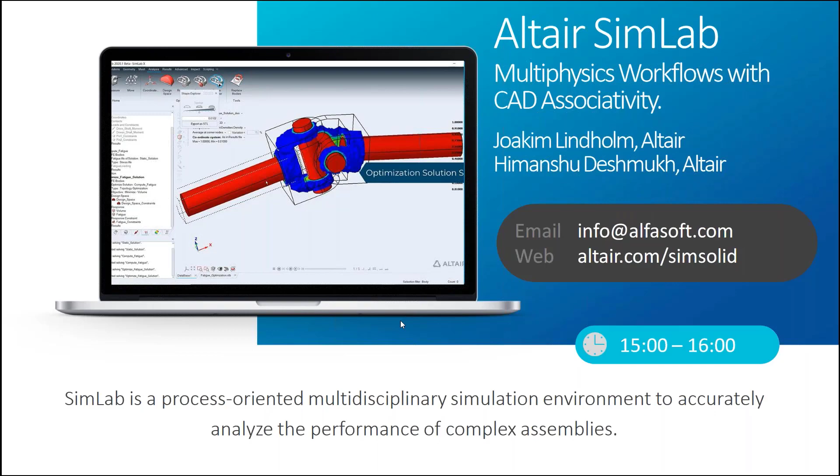Good afternoon, everybody. My name is Joakim Lindholm, I'm the Managing Director for Altair in the Nordics region. Altair is a US-based simulation software company that also does services, artificial intelligence, high-performance computing, and all sorts of things. But today, as all the naming confusion implies, we'll be talking about simulations.

We have quite a few different products and platforms called Sim something. Last time we presented at the Alfasoft demo days, we spoke about the product called SimSolid, which is a solution that allows you to analyze really large assemblies directly on the geometry level, and get results like stress, deflections, deformations, and eigenfrequencies. But today we'll be talking about a solution called Altair SimLab, which my colleague Himanshu will be doing a deeper dive presentation and demo of in a couple of minutes.

But before that, I wanted to give you a very brief insight into who Altair is and where we come from, and why SimLab is something that we hope you will find interesting. So just to give some background to who Altair is, we basically come from a background... let's see if I can change slide here. Seems like it's, there we go.

Altair is a company in the engineering software industry. We started out as a company doing engineering services in the simulation space, doing strength and stress simulation in the automotive industry, but quite early on started to develop our own simulation software to be able to perform those analyses. Currently we still have that as some of the main businesses of us.

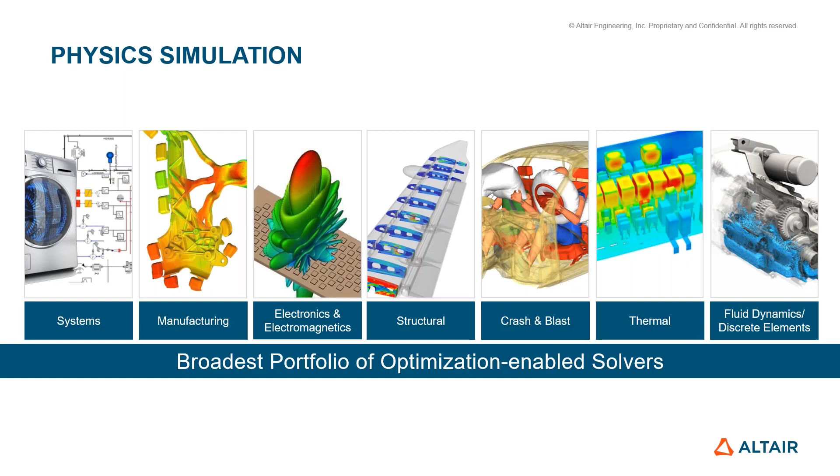As you see, the solution set is really extensive, and to tailor these solutions to different user groups, we package them in a couple of different simulation platforms.

For the large group of designers who benefit from being able to do some basic analysis to support the concept phase and get some insights and understanding that they can use in terms of enhancing the design, we have a simulation suite called Altair Inspire, which is really easy to use, fully geometry based and really intuitive.

On the other extreme, where we have the really skilled and highly competent advanced CAE engineers who do simulation every day, 8 hours a day more or less, typically you find those people in automotive and aerospace companies where they have large groups doing this every minute of the day. There's this platform called HyperWorks, which allows you to do very complex and advanced modeling.

And then in the middle here is what we will be talking about today, which Himanshu will be starting to showcase shortly, a platform called Altair SimLab, which allows you to model and simulate problems from a lot of different physics, both as single physics. So you can do a structural simulation on itself, or a CFD simulation on itself, but you can also start to couple the effects of these physics. You might have a CFD solution that imposes a pressure that results in mechanical stresses on the system, or things like that.

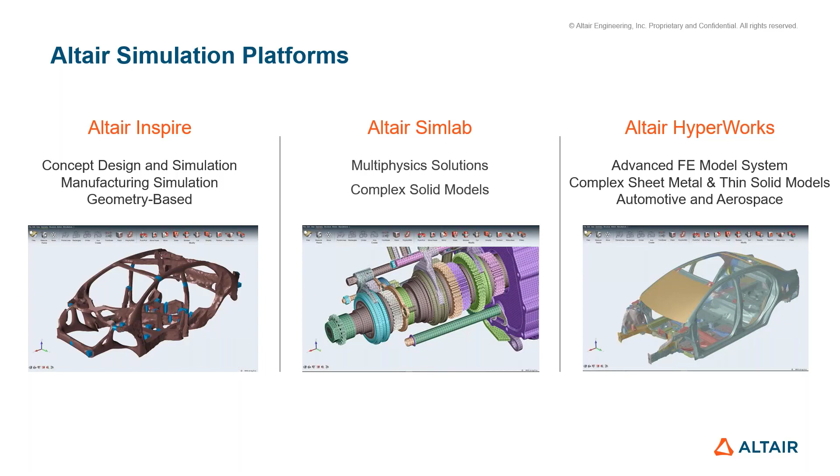So let's get started on SimLab. Joakim already introduced Altair, so I'll directly dive into SimLab. I am a technical guy, so mostly I'll be talking about the technical stuff related to SimLab. But before that, for a few minutes, let me introduce the solution capabilities of SimLab and also the modeling capabilities.

So whenever I present SimLab to users or during conferences, they ask me to define simulation software in the minimum number of words possible. So I usually define SimLab as an automated multiphysics simulation environment. That's 4 different words that we use. It's highly automated, it's a multiphysics simulation environment.

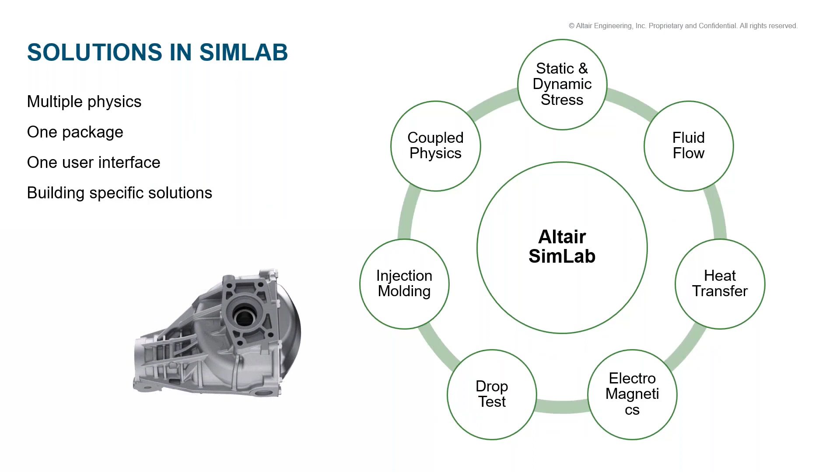So yes, you can do single physics as well, but if you want your physics to interact with each other, we have a tool called SimLab here at your disposal. So if you're someone who deals with 3-4 different physics, let me just move the slide a bit. Okay, so you can see Altair SimLab in the middle, and it can deal with static dynamic stresses, fluid flow, electromagnetics, injection molding, which is a manufacturing simulation. We got you covered with Altair SimLab.

And if you're someone who deals with 3-4 different physics day to day in your life, be it structural, fluid, electromagnetics, and if you are too lazy, or I will say too smart to learn different tools for each of them, we got you covered here at Altair, and Altair SimLab is here at your disposal. So to summarize about Altair SimLab, it's one environment to solve all of your physics needs.

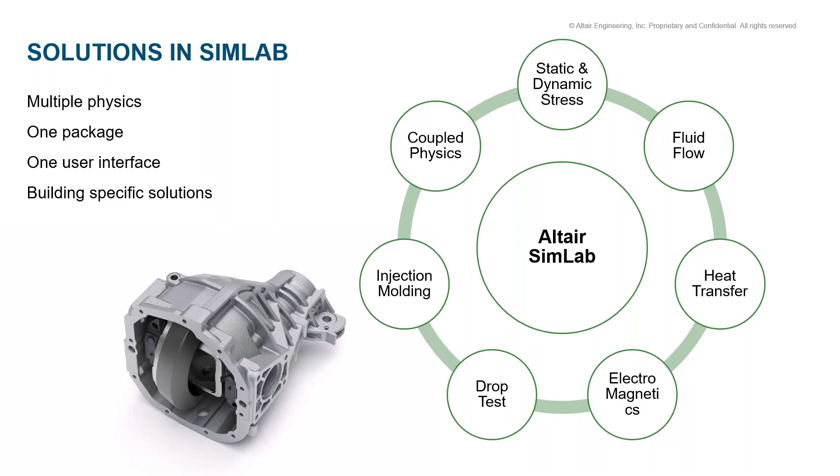Moving forward, apart from the usual process, which usually all preprocessor packages with a solver can do, where you can bring in a CAD mesh, set up the model and analyze it, what you get in SimLab is automation capabilities, and it goes way beyond just analyzing the model. So you can actually set up additional design of experiment runs, or do mesh convergence studies, or coupled physics analysis, in a single environment, which is SimLab itself.

So it just does not stop at the post-processing part. You can take and do design convergence or design of experiment studies to analyze what factor of design is affecting, let's say, stress in your model. So it goes beyond just analyzing the model.

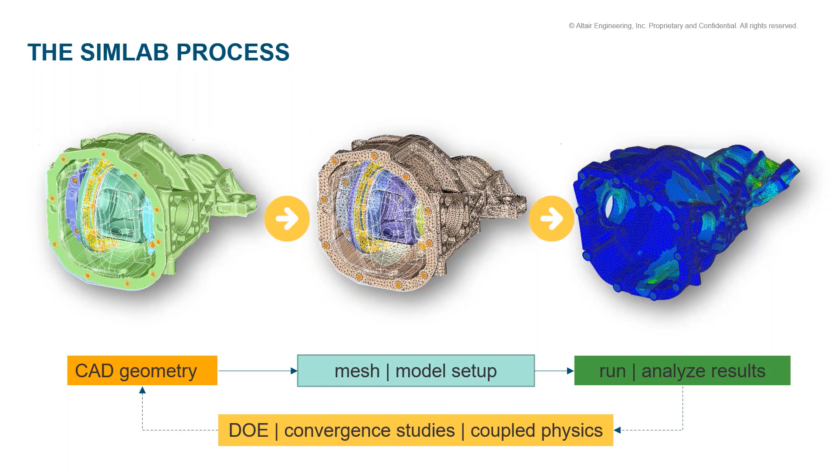What sets SimLab apart from its competitors in the market? Let's talk about a few notable features we have. It's SimLab's ability to cater to the needs of everyone in the industry. I will say it's not just for someone who is really advanced in the FE environment, or just for someone who has just started his FE career. SimLab is a perfect balance for all types of industry professionals.

So let's say if you are a design engineer and you don't want to spend a lot of time meshing the component, SimLab's single click meshing is ideal for you, so that you can just mesh the component, don't spend a lot of time understanding those meshing processes, just give it a quick run and see how the model is behaving.

If you are a simulation engineer whose job is to do simulation eight hours a day and you are very particular about meshing quality, SimLab provides excellent mesh control strategies to generate very high quality mesh. You can devote all your time to meshing each and every single component with utmost precision, and hence analyze to utmost accuracy as well.

Or if you are someone already advanced in your career, leading a team, or a manager looking to set up robust, repeatable, template-based simulation for your team, you can establish a workflow that your team can follow in order to improve accuracy and ensure repeatability. SimLab lets you do this without actually scripting, since we have template-based solutions available inside it.

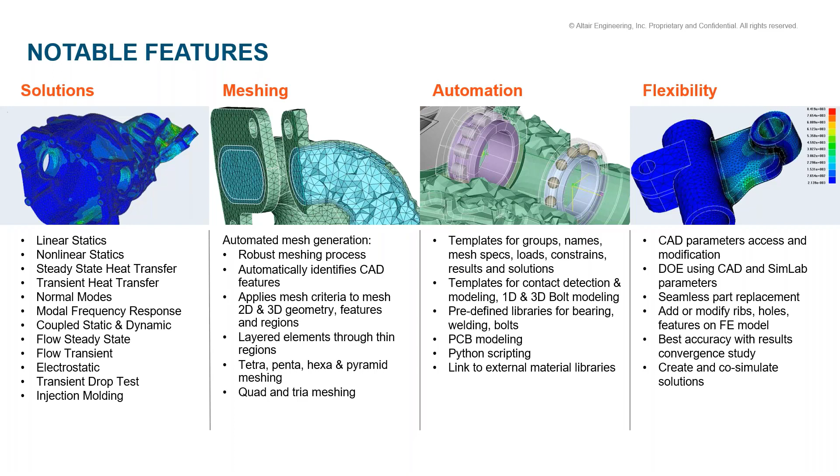And last but not least, if you want to automate each and every single step of simulation inside SimLab, you can use a very simple Python script, which I'm going to showcase in the live demo, to automate each step right from CAD import to post-processing. So these were a few notable features that really set SimLab apart from its competitors in the market.

Some typical industry applications of SimLab: its 3D meshing and automation capabilities are widely used in the powertrain industry for engine, gearbox, and brake simulations, among others. You can also model detailed welding inside SimLab and later take it to fatigue simulation, which is really important for the powertrain or automotive industry.

Another thing is SimLab's multiphysics capabilities, especially electromagnetics, thermal fluid, and noise simulations, which make it a widely used tool in the electric vehicle domain. Lastly, its ability to easily create hex meshing tools like hexahedron mesh makes it one of the favorite tools for consumer electronics study, where you can do hex meshing and then take it to drop test or explicit simulations. The main industries using SimLab's explicit simulations are consumer-based industries like small electronics.

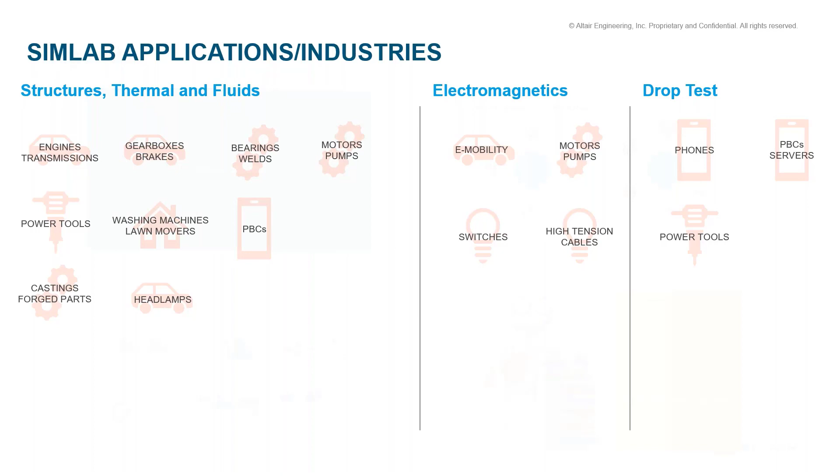So this was a brief about SimLab. I do have close to a hundred slides that I could keep talking about, but right now I'd like to jump directly to the demo part. Maybe if we have time, I can come back later to the PPT and talk about more physics. Let me go back to the SimLab environment.

I'll open an empty SimLab session with you. The tool currently in release for SimLab is 2022. If you're already an Altair user, you know about the Altair One account, and you can go to the Altair Marketplace on Altair's website to download SimLab, just like you download other Altair tools. If you're new to Altair, you can get in touch with Altair's marketing team on the website, and they will guide you on how to download demo versions and the software you need.

Once you have SimLab on your system, you can also run it on the Altair cloud depending on your licensing type. Right now I'm using it on my local machine. This is how SimLab's environment typically looks. You can see straight away on the GUI the different physics we offer under the solution tab, starting from structural, thermal fluid, electromagnetics. We've done a lot of work this release on e-motor acoustics. We also have manufacturing simulation, injection molding, and you can model welds with utmost precision.

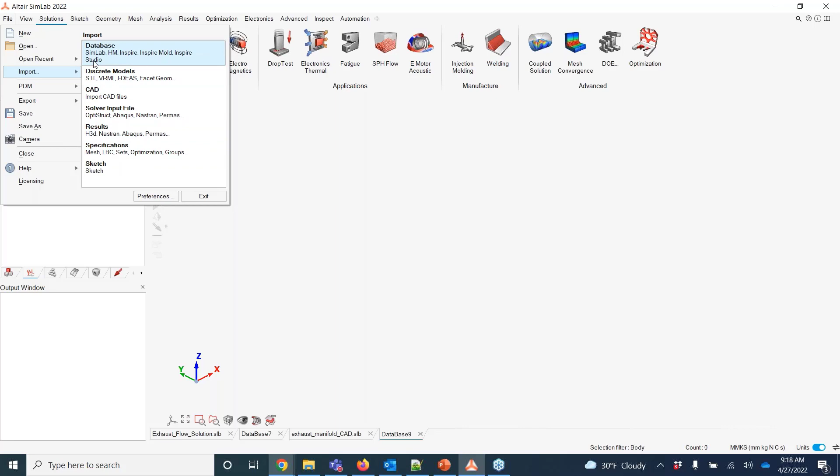Right now I'm just going to import a SimLab database, so I'm not importing a CAD. So if I open it, this is a simple exhaust manifold geometry. If I come to the assembly browser, you can see the geometry being reflected here.

The visualization option can be figured out using either right click, or you can just click next to the model. As I was mentioning, let's give it a single click meshing - I'll go to mesh, surface mesh. If you're not even willing to spend 5 or 10 minutes on meshing, you can just directly jump onto the TET meshing side.

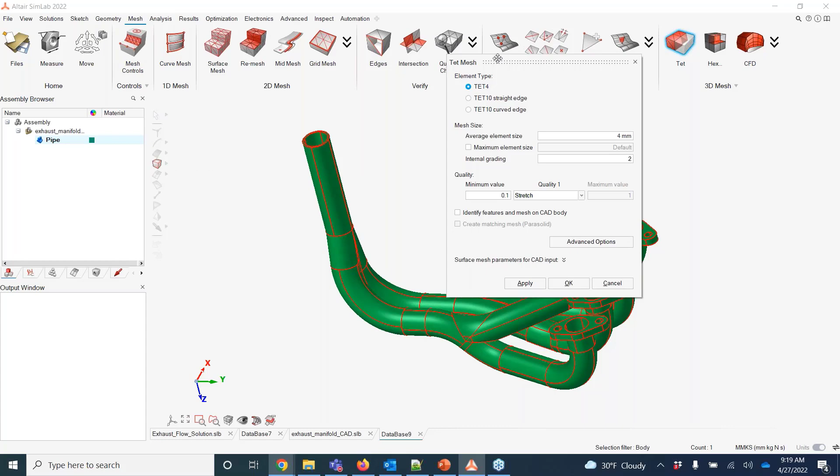I'll just change the units to millimeters. You can also see it's a unit based system, so many units are being supported here - mmks. So you can directly create 3D mesh out of it without giving much attention to detailed surface meshing. Right now I'll just be doing a surface mesh and putting a demo size of 4 millimeters. You can play around with all the other factors as well. So just hit OK here.

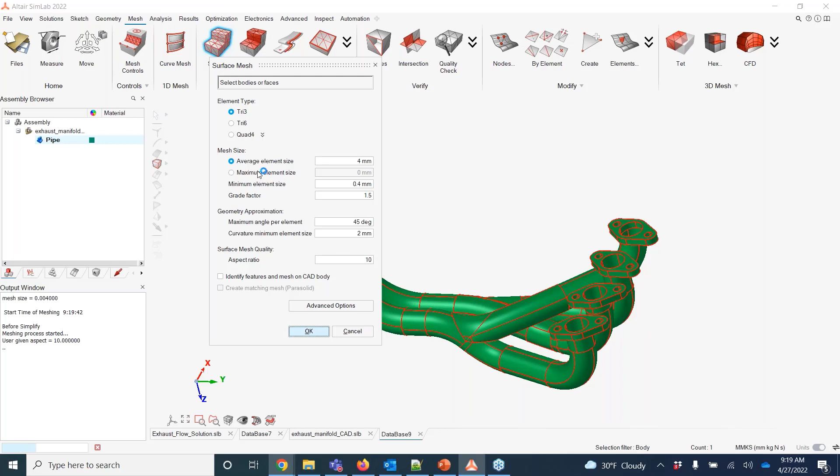The average element size I'm putting - you can also control it through maximum element size as well, or grade factor, or whatnot. It hardly took like 10 seconds for creating mesh of this bit complex looking part. If I zoom in, the details look pretty good to me, at least from a visual point of view. You always have an option to go and check the qualities as per your requirement.

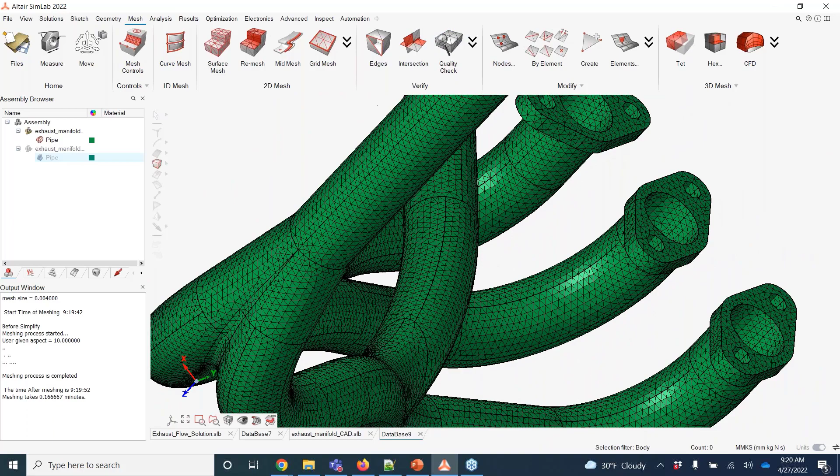Since now I want to create a fluid solution, and I also want to create a structural solution out of it, by rule of thumb, I will try to keep a few layers of elements inside this solid. You can see there's just one layer of elements, so you do have a bunch of options which will let you control your mesh properly.

Right now I'm going to go into the layered mesh option, just select this change layer option. Here I can control the number of elements that I need to be creating on axis or along the radial direction. So right now, let's say I'll click on this face, and I want 3 layers of elements on the surface. I'll just hit OK here.

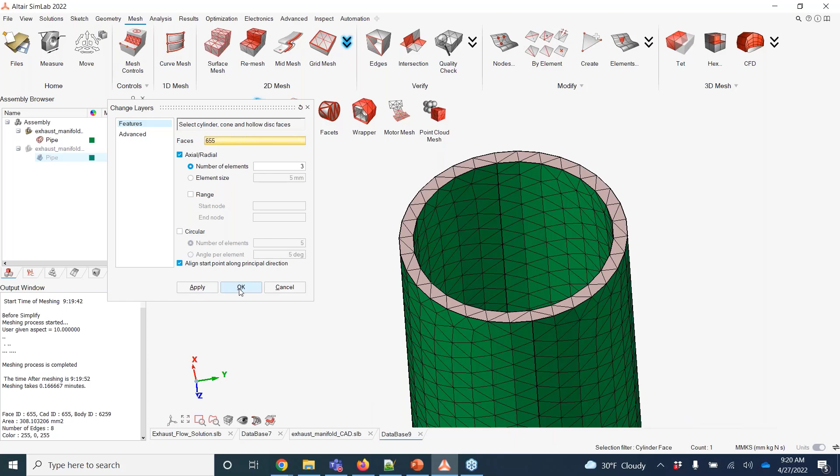You can see with the use of a single click, without using much complicated tool, now you have split those single elements into a layer of 3 elements. So this was happening just on the surface, but you also want to create 3 layers of elements inside the metal pipe. So I was mentioning you have detailed mesh controls.

So when you want to take it from a surface mesh to a solid mesh, what you want in the middle is 3 layers of elements through the thickness of the pipe. So I will go into the mesh controls now. These are the options which will let you control your mesh more effectively and give you greater control over mesh.

So I'm just going to say volume layer mesh control here. On this particular body, I'm just selecting the body, and I'm telling the software that I need 3 layers of TET when I convert that into tetra element mesh. I'm just going to hit OK.

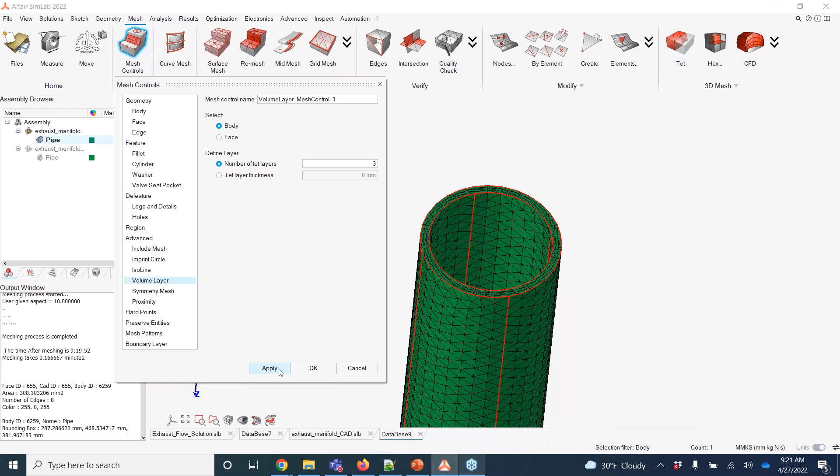If I go to the mesh control panel now, you can see that SimLab is telling you that on this particular body, you have applied a mesh control with the name volume layer mesh control. So that's one control that I wanted SimLab to apply on my meshing model. This looks like a good mesh for at least the pipe.

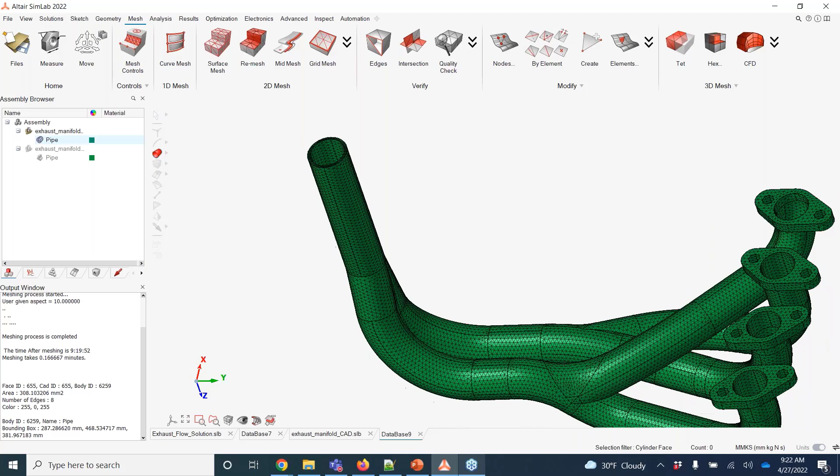Now, since this is a thermal fluid interaction multiphysics simulation, we also need to create a fluid domain inside it. People who are familiar with CFD runs will understand the importance of how complex it gets when you are asked to create a fluid domain inside a solid. SimLab makes our life easier in this case.

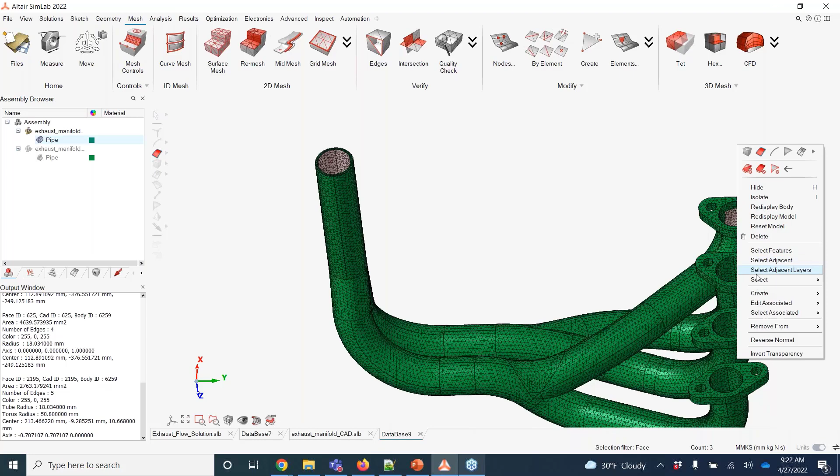What I'm going to do is separate out the faces where the fluid is going to touch. In other tools, you might be selecting these one by one, or you might have an option to select adjacent, but this is not enough when it comes to very complex geometry.

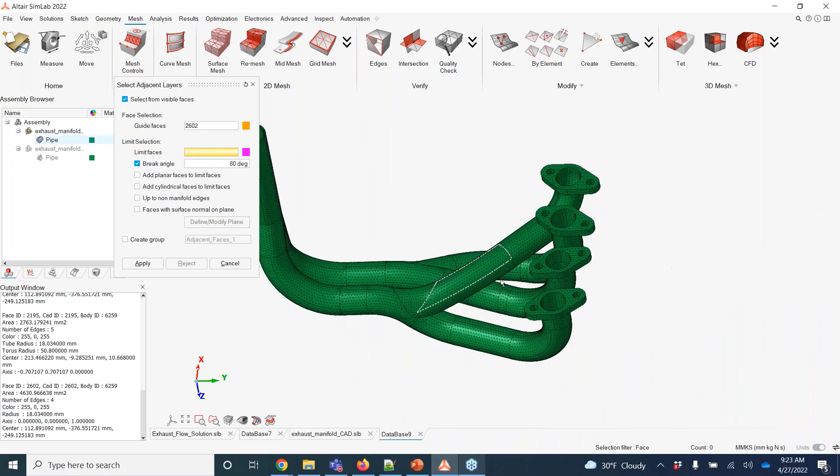SimLab does provide intelligent selection tools, and we'll teach about those in our detailed training. Right now, I'm just going to select a face, right click, and say select adjacent layers. I'll tell SimLab that you can stop your search on these faces, and whatever faces come in between these two faces under an angle of 80 degrees, select that for me. I'm just going to hit apply.

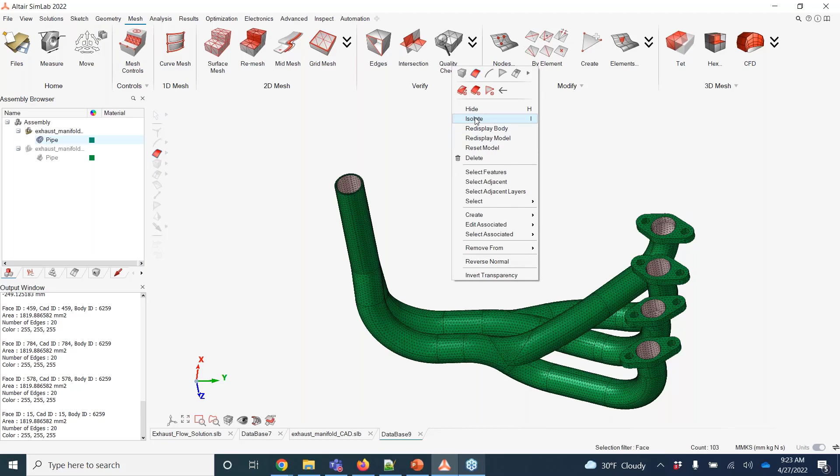You can see SimLab has selected all the internal faces of this solid. I'm just going to close this tool, right click on my screen, and say isolate. You can also use shortcut menus.

I have isolated all the internal faces of this pipe, and now I'm going to create a fluid domain on top of it. I'll go on the geometry, say create, and we directly have an option of creating a fluid domain. I'm going to select fluid domain, wetted surface where the fluid is going to touch. I'm going to select all of these, and you do have an option of selecting or meshing the inlet and outlet face with a different size.

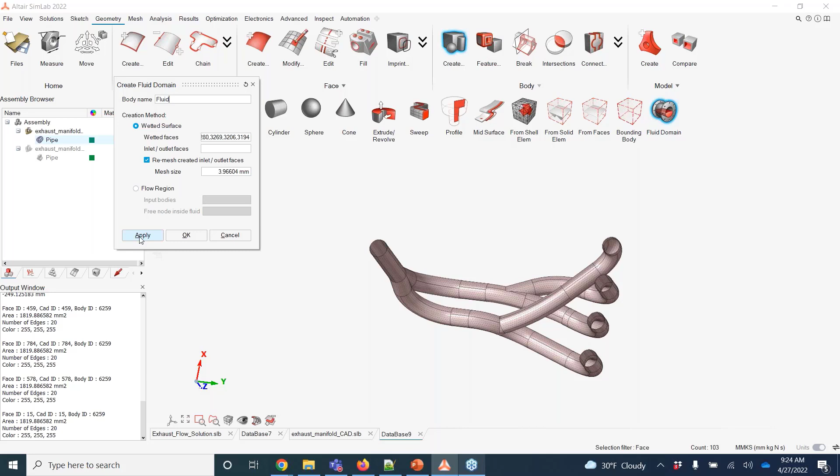Let's not go into it right now. I'll just rename that as fluid and hit apply. This might take 30-40 seconds, not even that—I think it hardly took 5 seconds. So now I have created the fluid domain.

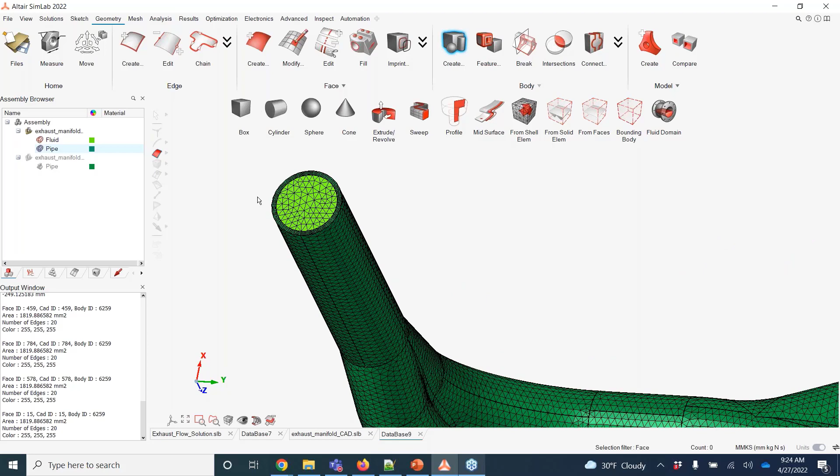So I have two surface meshes with me right now: one for the pipe, one for the fluid. I can always hide and show them. You can see inside the pipe, you have now created your fluid domain. Again, it's a CFD based solution—it's a fluid and structure interaction.

What we want to do right now is create boundary layers on the fluid. Again, people who are familiar with CFD know how difficult it is sometimes to create accurate boundary layers, which is of utmost importance when it comes to CFD flow simulations.

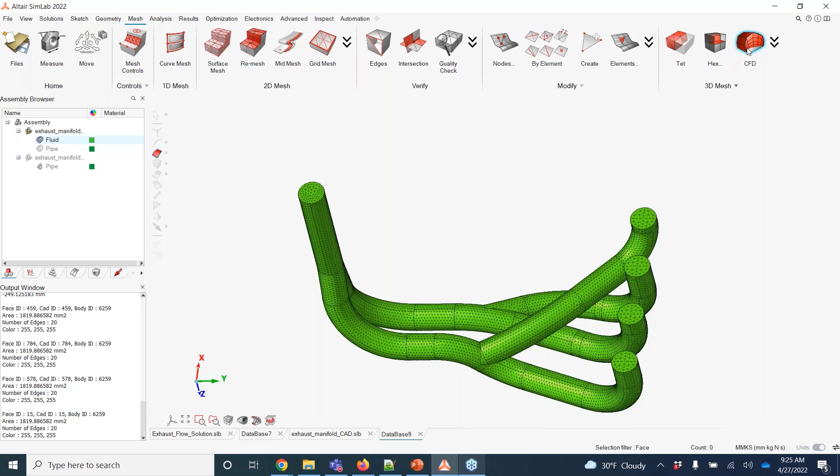Let me now go to the mesh and select CFD. As I was mentioning, we have different meshing tools available. It's a multi-physics environment, so you not only have meshing tools for solids, you can also create hex if you want to do explicit simulation, or create a CFD mesh. So right now I'm just going to create a CFD mesh. It's very interactive—it's just asking you to select the fluid bodies that you want to create the CFD mesh on. So I'm just going to select my fluid.

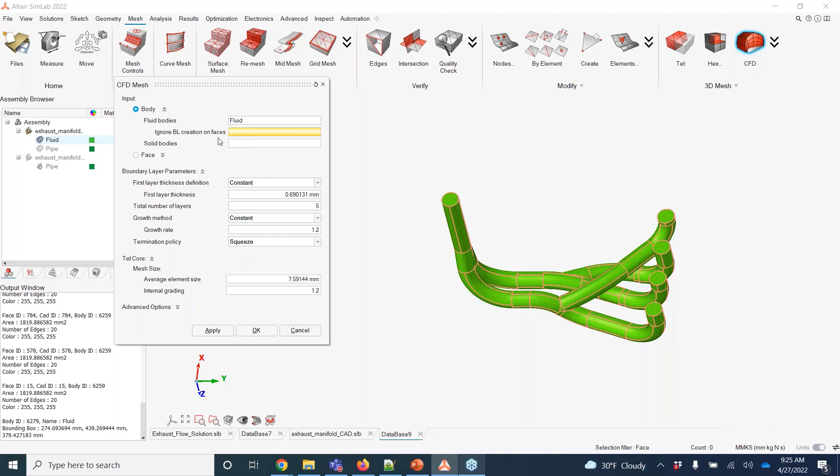It's asking where you want to create boundary layers, or whether you want to ignore boundary layer creation on certain faces. I'll say I don't want to create boundary layers on inlets and outlets—if you wish, you can leave this empty. I'll keep the first layer thickness as 0.5, which is in millimeters, yes. I'll keep the total number of layers as 5, and I won't play around with the average element size. If you want, you can use more control over it. I'm just going to hit apply.

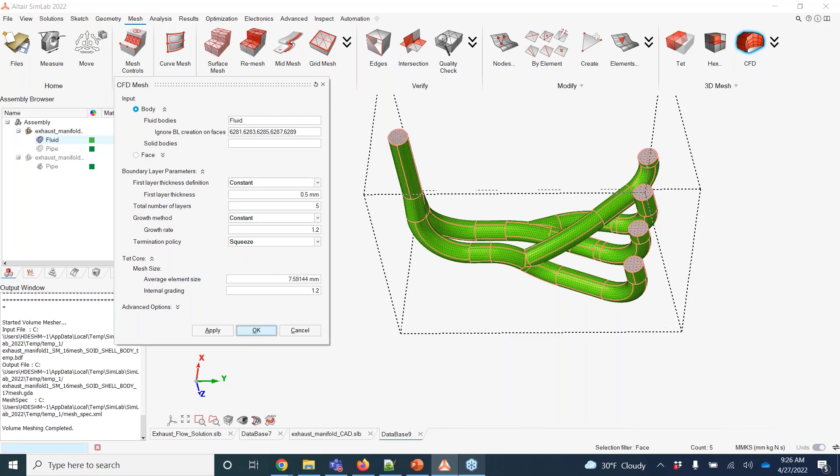This might take a few seconds, but meanwhile we can discuss this option. You do have a few options where you can change the thickness of the boundary layer. Instead of keeping each boundary layer at a constant thickness, you can tell the software if you want it gradually increasing or gradually decreasing—those can also be changed.

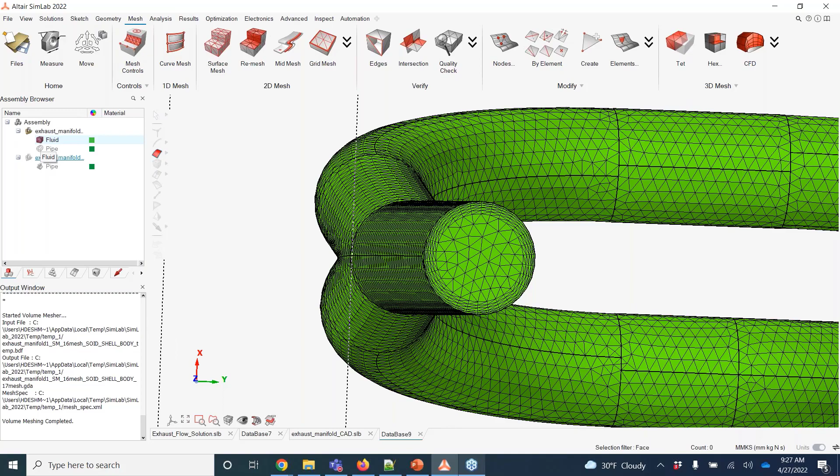If I zoom into my mesh now, with a single click and not a bunch of clicks, you can see it has beautifully created boundary layers on the fluid domain. Also, the mesh has now been converted from a surface domain to a solid domain, as you can see. Let me just hide this fluid—so our fluid domain is ready with us.

I'll just hide this and open the solid pipe. So the solid pipe is still a surface mesh—we want to convert it into a 3D mesh.

With a single click option in SimLab, we'll just go to TET mesh. We'll select the order of the element we want, maybe first order or second order based on your need. Then you can give the element size, and here you can control the quality criteria that you want SimLab to follow. Usually I set my TET collapse to 0.12—I keep it for OptiStruct, but you can have your different requirements and control it from here. Right now I want SimLab to keep a minimum value of 0.12 for TET collapse, so I'm just selecting that part and hitting apply.

And say okay—so this is now going to create TET4 elements inside this surface geometry.

In an ideal world where you want to pay more attention on your meshing, the process would be to create surface mesh, clean it up, check if the qualities are good enough for your requirement, and then take it to the TET meshing tool. All the meshing parameters can be seen here in the output window. At any point, if you feel you want to abort the meshing, you can just click on the red icon here and the meshing would be closed. So it's almost done. The meshing looks like it's been done in 13 seconds for this complex model.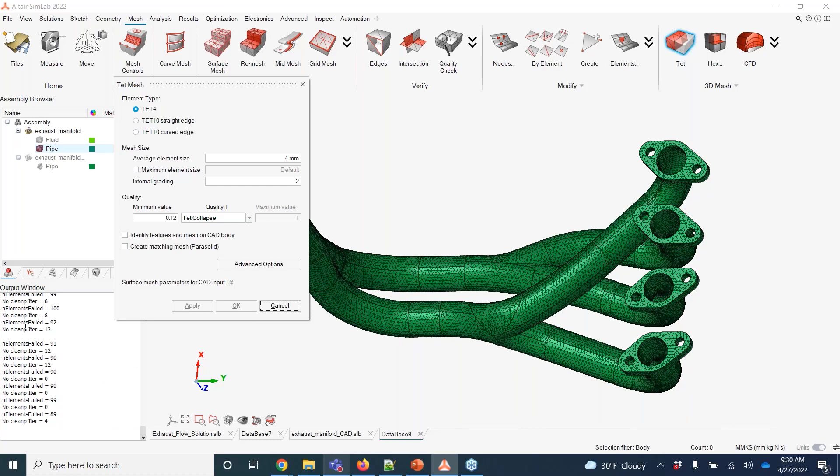Maybe for this webinar, I feel I've clicked at a wrong place, that's why it's taking so much time. SimLab is telling you the number of iterations it took to clean up the mesh, and it's done. So I'll just cancel this tool.

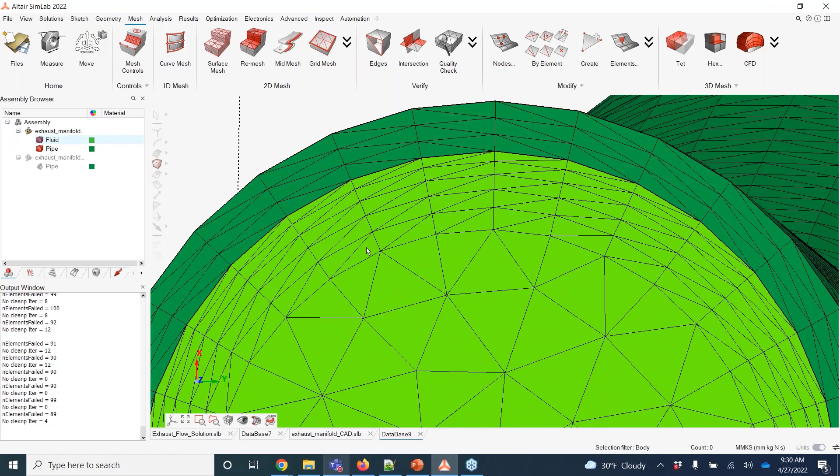Now you can say pipe and fluid are both now converted into 3D meshes. So a nice looking layered mesh on the solid as well, in order to achieve that accuracy. Then a constant volume layer thickness and fluid domain in the middle. If I take a section cut of this model, I can show you how it looks from the inside.

So if you remember, we had given a volume layer mesh control to SimLab. We had asked SimLab to create 3 layers of elements inside the solid to achieve the desired accuracy. You can see there are 3 layers in the pipe itself - these are solid layers, not boundary layers. And this is your fluid layer, which is called a boundary layer in CFD terms. And then there is the fluid domain. So it looks pretty decent to me, at least from a single click point of view.

There you go, so your mesh is ready with you right now. Next thing is to take it to the solution and set it up. So meshing itself is ready. Now let's go to the solution tab and create a solution.

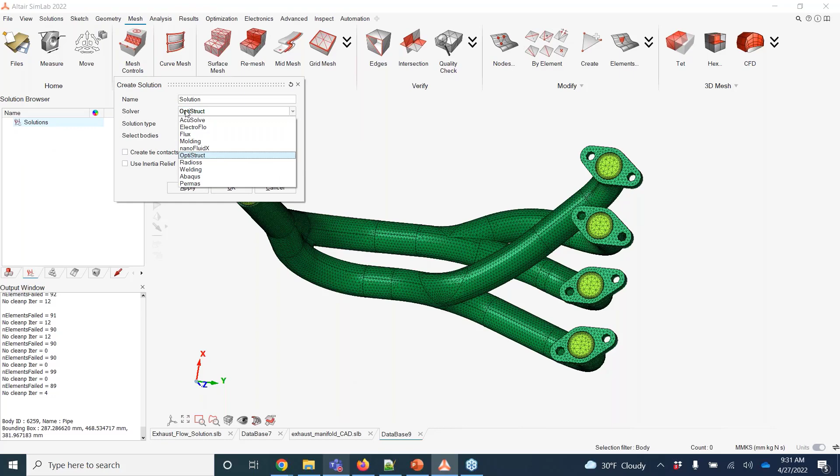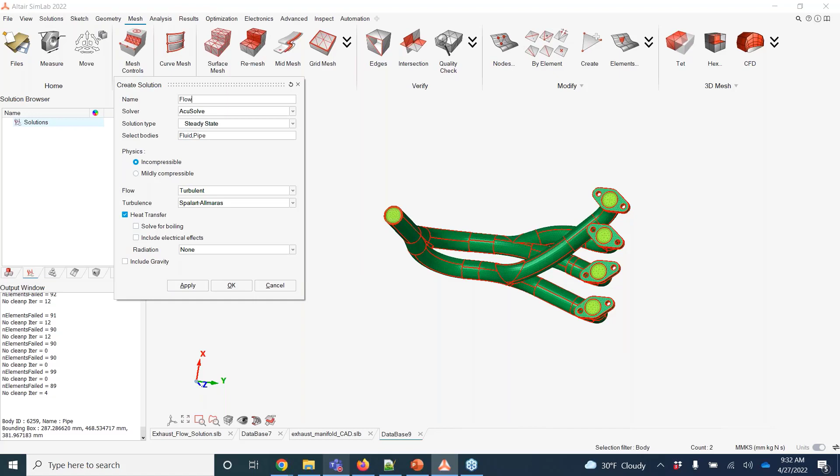Right now I am going to create an AcuSolve fluid solution, like a steady state fluid flow. The bodies that are going to undergo solutions are both of these - fluid and pipe - incompressible fluid, and some turbulent model. I'm going to hit apply. Let me rename it as flow simulation, and I'm also including heat transfer into it. So just hit OK here. So the first solution has been created as flow.

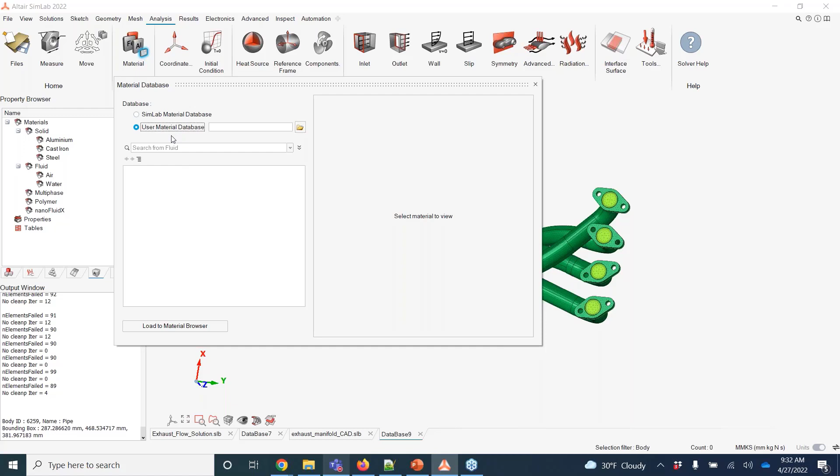Before jumping into boundary conditions, let's create the material. SimLab offers a few default materials inside it already. If you're not satisfied with those materials, we have a library from where you can import material. So you can go to material, not the creation, I'll go onto the database. We have materials supported for different industries - electronics, polymers, fluids, and all. You can either import from there, or create your own material database, whatever you want, if you want to populate it across your team.

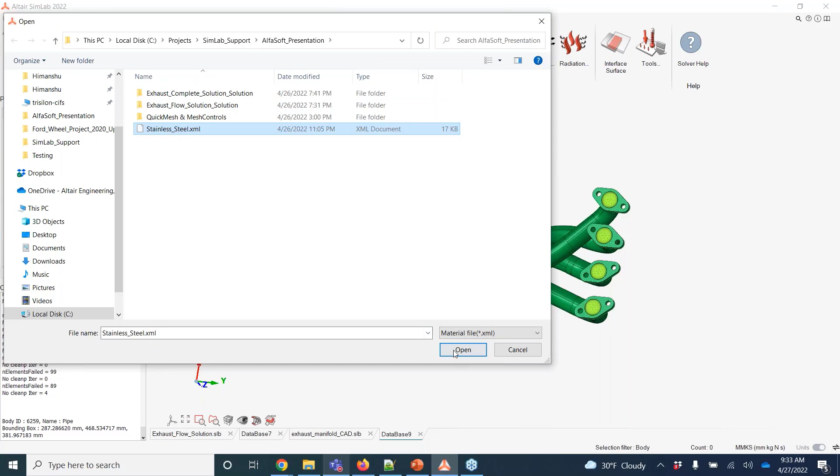Right now, what I'll do is import a stainless steel material that I created for the sake of this webinar. So I'm going to import a material. It's extremely easy to export the material also - I've already exported it, so I'm just going to import it. So the material is now into my SimLab database.

I can use it now. I will go onto the bodies - you can also select the bodies and assign material to them, I usually do it from here. So material to pipe, I'm going to assign stainless steel. To fluids, I'm going to give air.

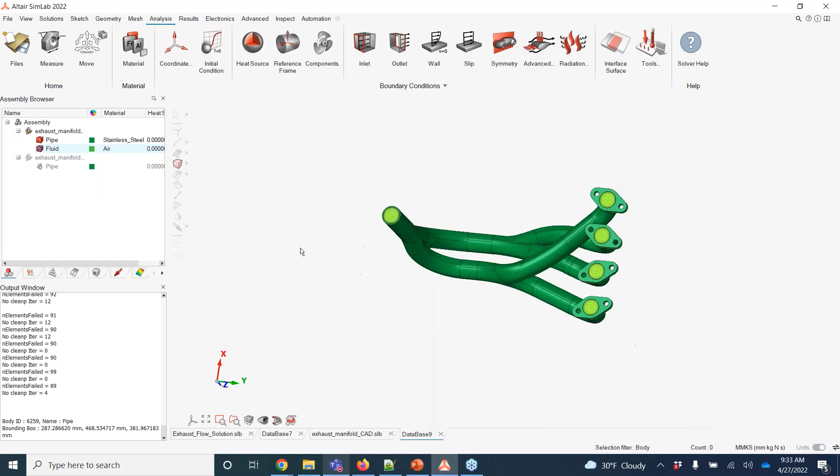Come back to solution, set up the boundary conditions. It's pretty intuitive to set it up, and the workflow of SimLab also moves from left to right. So for inlet boundary condition, let's just change the unit to MKS.

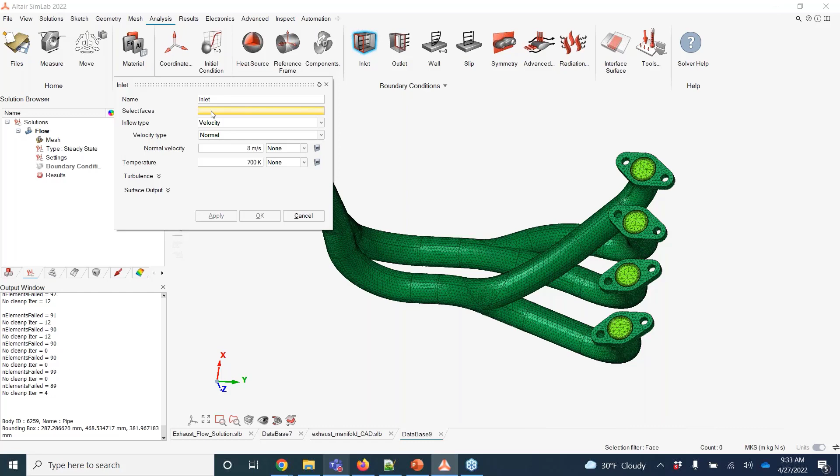I want the inlet to go from these faces at a velocity of 8 meters per second and at a temperature of 700 Kelvin. So I'm just going to hit apply here.

Outlet, I want to keep at 0 pressure. I just tell SimLab that this is the outlet. You can change the name to whatever you want and just hit apply. So inlet and outlet are done.

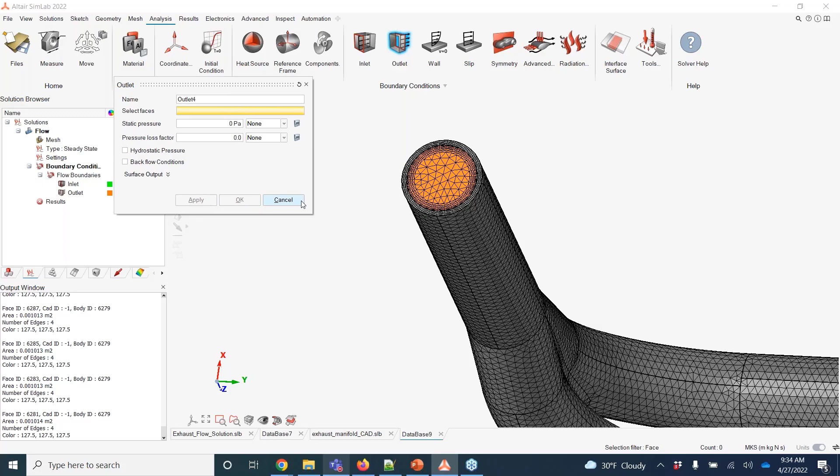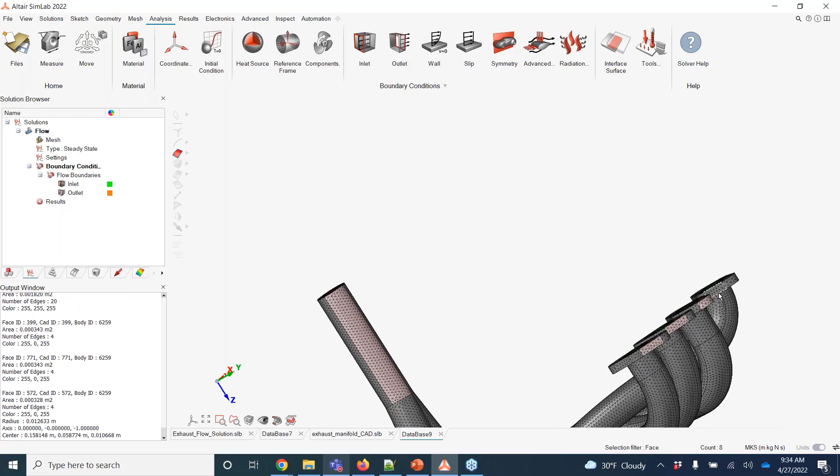Now let's give wall boundary condition for fluid flow. First I'm going to select all the faces where I want to give wall boundary conditions. Instead of doing single clicks on all the faces, I'll just select one face from each of the domains I want: one on top, one on the bottom, and one on the side, and then use the automated selection tool SimLab offers, select adjacent layers, and just hit apply.

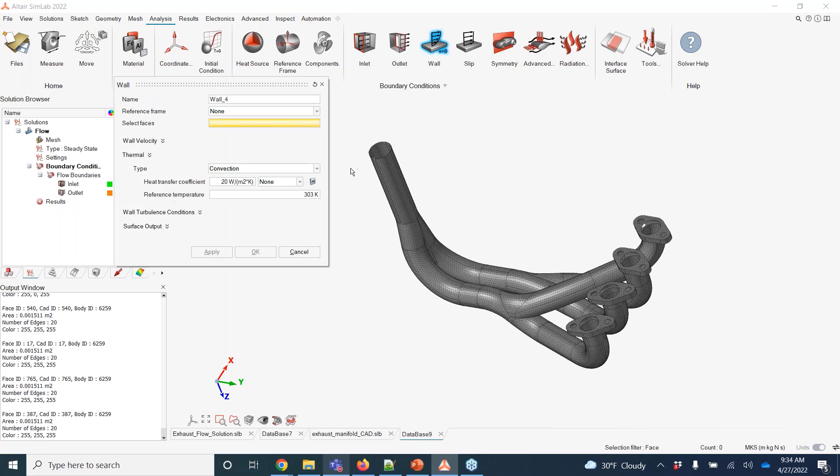Now SimLab has selected all the outer faces. I'm going to isolate them. These faces are now isolated, you can see. And I can easily apply a wall boundary condition by just drawing a rectangle around it.

I want to give a convection boundary condition with the heat transfer coefficient as 20 watts per meter square Kelvin and the reference temperature as 30 degrees Celsius. I'm just going to hit apply, and now I'll redisplay the model.

So we are all set as far as the fluid solution is concerned. You can right click it and update it. You can see that right from CAD import to solution, we never exported any solver deck or anything. Everything has been taken care of in the SimLab interface itself.

It's a complex model, the meshing is fine, so the solution will take some time. I've already solved this model, so if I open this, the solver solution is already solved here.

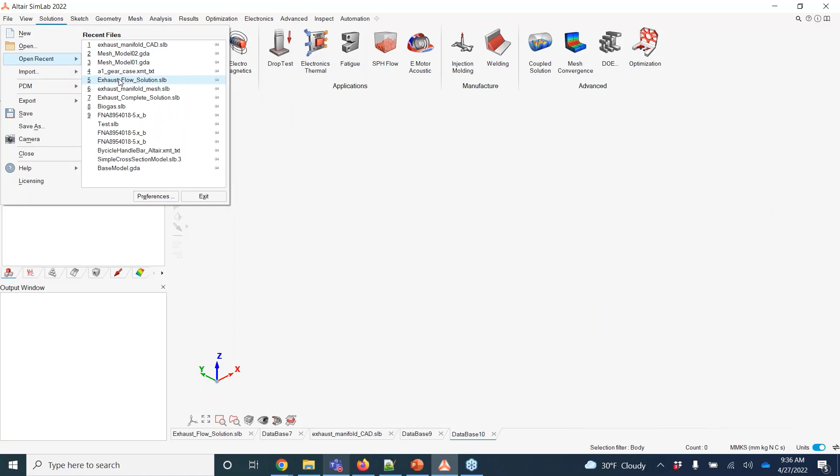Maybe what I'll do is just open the flow simulation solve. That was a complete solution, flow and structure combined. Let's see if I have just the flow solution with me. Yes, I guess I have. There you go, so this is just the flow solution.

The boundary conditions we gave in the webinars are exactly the same here: inlet, outlet, and wall conditions. And you can see how the temperature is varying. So that was just one physics.

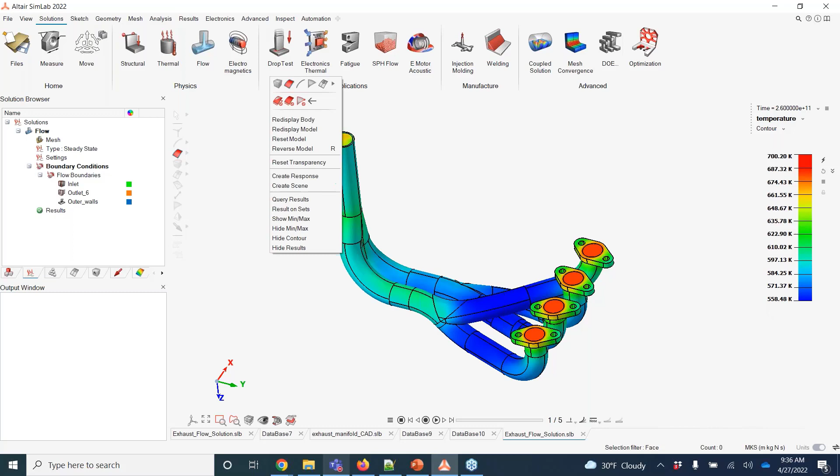Now let's set up another physics, which is a structural run. I am going to right click on the GUI and hide the results. Okay, and from solution I'll right click, create solution, and this time I want to create OptiStruct linear static solution.

The bodies going under the simulation are just going to be the solid steel or stainless steel body, which is the pipe. So I'm just going to select pipe and hit OK. When I come back to my solution tab, you can see that now we have two physics.

One is flow, and maybe I can rename that as static. There you go. Now let's apply boundary conditions.

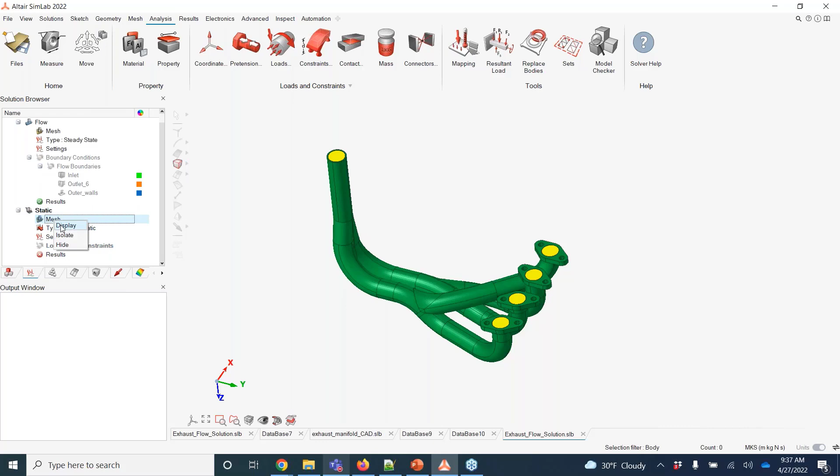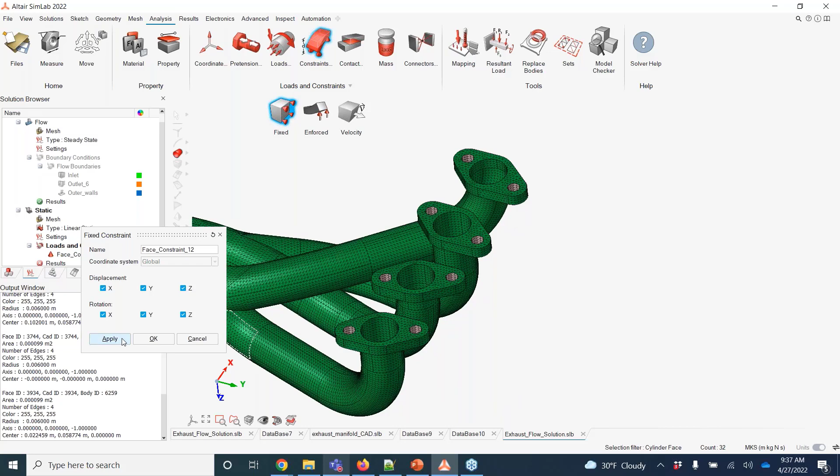For the mesh, I will isolate it so you have only the bodies undergoing this simulation. Just go onto the constraint, fix this guy, and also fix the bolt location. Just come here and quickly fix all of them. There you go, so this is just about the static run.

Now comes the multiphysics capability of SimLab. Copying loads from your previous solution is extremely easy into SimLab. Since you have two physics inside it, SimLab automatically knows that at some point you're going to link those two. So if you right click on your load and constraint, it's already giving you the option.

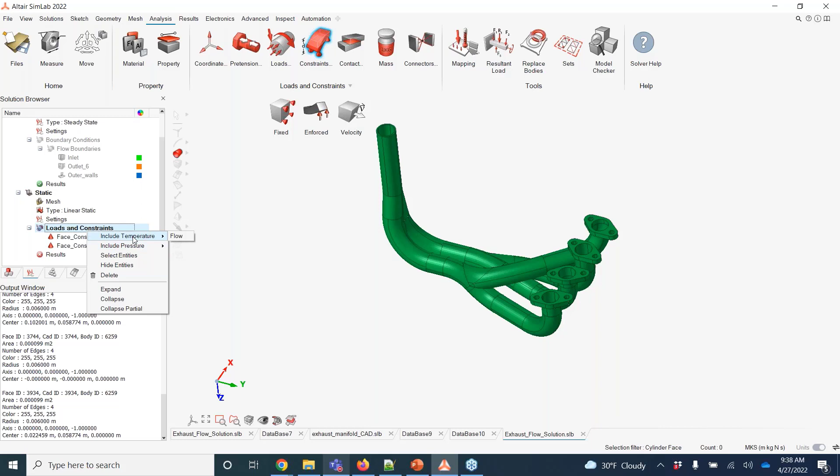Do you want to include temperature from your previous solution, which is flow, or do you want to include pressure from your previous solution, or maybe both? Let's include the temperature first. So temperature is mapped onto these elements now from the previous solution.

Similarly, we can select all of these faces and tell SimLab that I also want to map pressures from my previous solution onto this solution. So just map pressure on it. Mapping pressure takes some time, like 30 to 40 seconds, so I might need to wait for it.

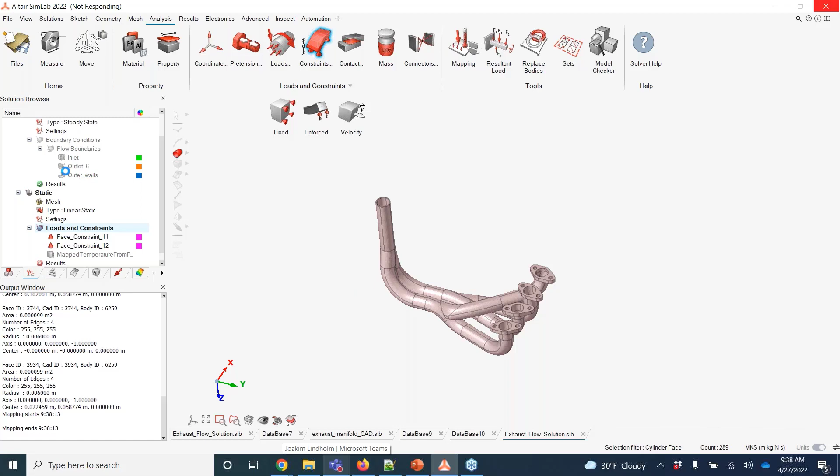Since it's mapping each and every pressure that was solved in the previous run onto this run now, both temperature and pressure are mapped onto this solution. You can simply right click on the results and say update, and it's going to solve both physics combined. The first physics is already solved, so whatever matrix comes from that physics is now being copied into the second physics and it's going to solve it. I have already solved it.

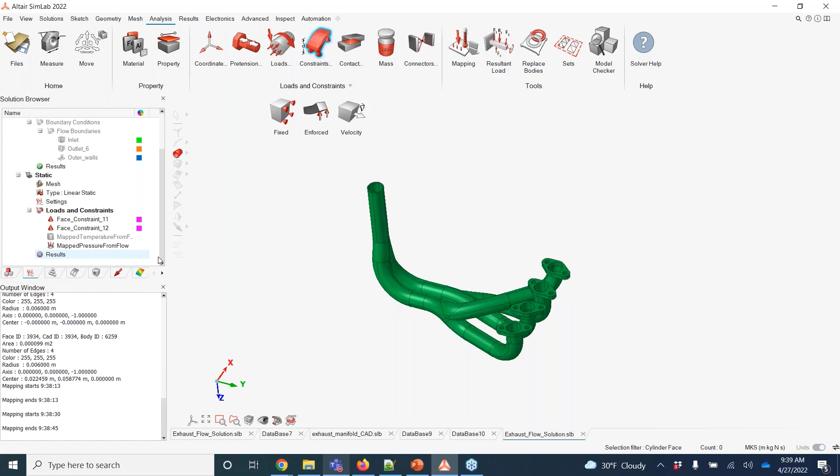So you can see this is the flow solution and this is the static solution, right? If I just play a scaled version of the animation, this is how the hot air flows inside this exhaust manifold, and the pressure it applies is how it's deforming it when it comes to the thermal structural interaction part. So this is a scaled version.

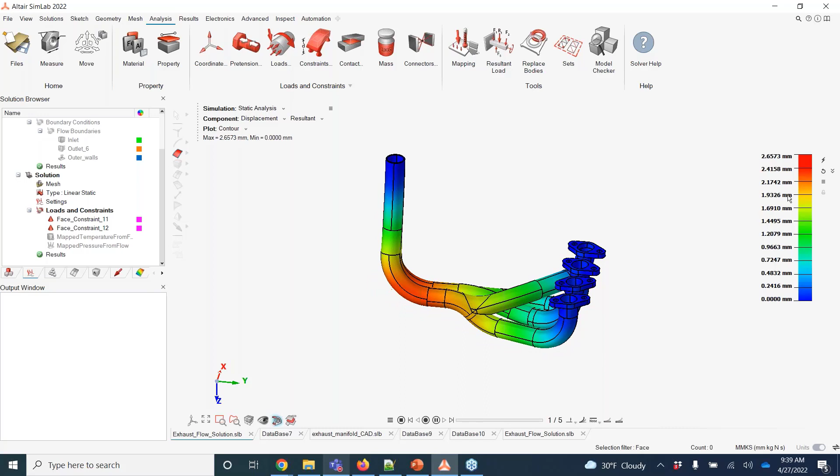The deformation that we are seeing is 2.6 millimeters. We do have detailed post-processing tools that you can play around with later. But let's finish this multi-physics simulation demo right now and move on to the automation part, which is again an interesting part of SimLab.

So this was about multi-physics. We do have way too many physics that you can combine all together. Let me just quickly go on to those physics and show you a glimpse in the PPT.

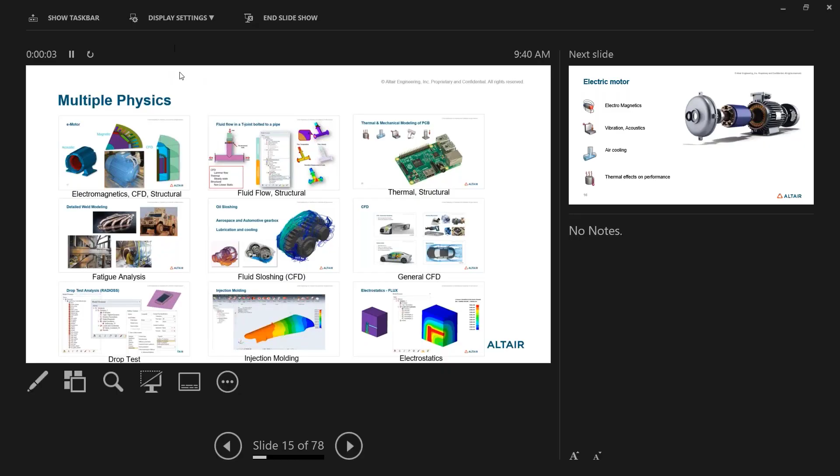The physics typically that SimLab supports along with different Altair solvers are electromagnetics. If you are someone looking to design electric motors, all of your electric motor solution is going to be present inside one single interface, that is SimLab.

Or if you're doing fluid flow or interaction between them, or if you're interested in simulating PCBs, which are in high demand in the industry right now. So all the simulation regarding these printed circuit boards, starting from vibrations, random vibrations, fatigue, or maybe coolings, all are supported in the SimLab environment itself.

And then an interesting part is your manufacturing simulation. Not many tools in the market combine CFD fluids with manufacturing. So yes, you can do injection molding here in SimLab itself.

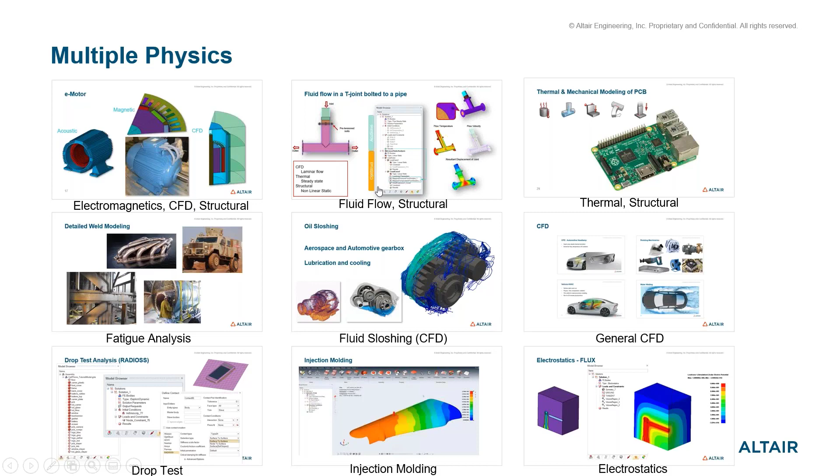So let's quickly now close it and move back to the tool, and I'm going to open a new database. The objective of the second demo is to explain how easy it is to automate stuff in SimLab.

As I was mentioning in the previous demo, whatever you do on the GUI, every single mouse click is being recorded in the background in a Python script. So if I go into automation, say script and open session script, everything that you do, let's say I had applied load mapping on that model - pressure and temperature mapping - this complete section here is about mapping. So you can simply copy this section and paste it in your script.

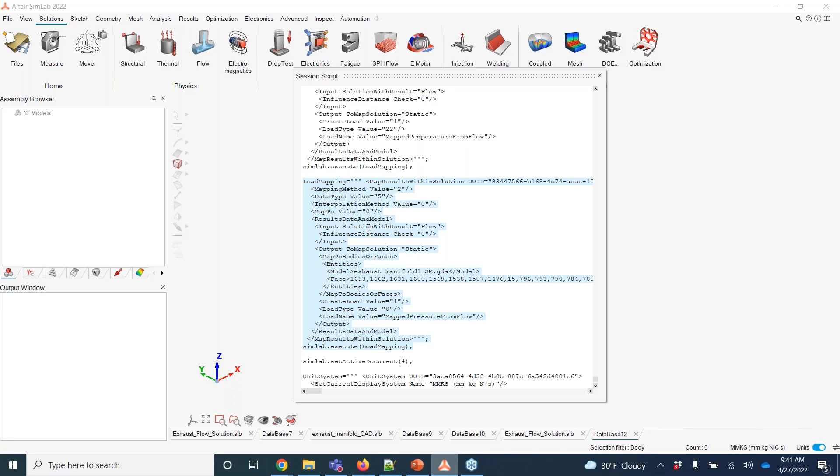Let me just quickly show you a demo of how I do it. So I'm just going to do file, import CAD - quick mesh control testing, and this is a parasolid. Just going to import it.

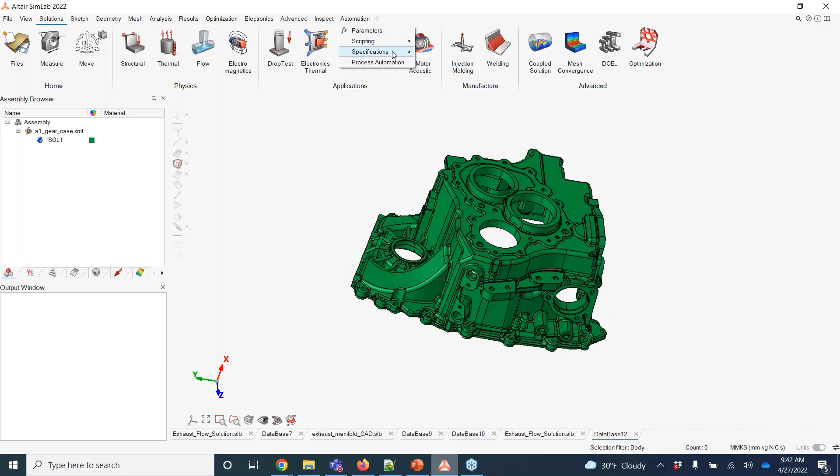So if I show you a test import, this is a test script that I just created. How I created this script is I did everything on the GUI. I imported CAD - so I was importing CAD. I went into my automation scripting and session scripting, I saw what code it is writing for importing the CAD. I saw it is, okay, importing parasolid. I copied this completely, I said copy.

Okay, you can see the path here. You can also change the path and file name if you want to convert the hard coding into soft coding. I just went into an empty script, empty SimLab script, and I just pasted on top of it, import solid. So that was my first command. I came back again to the SimLab interface.

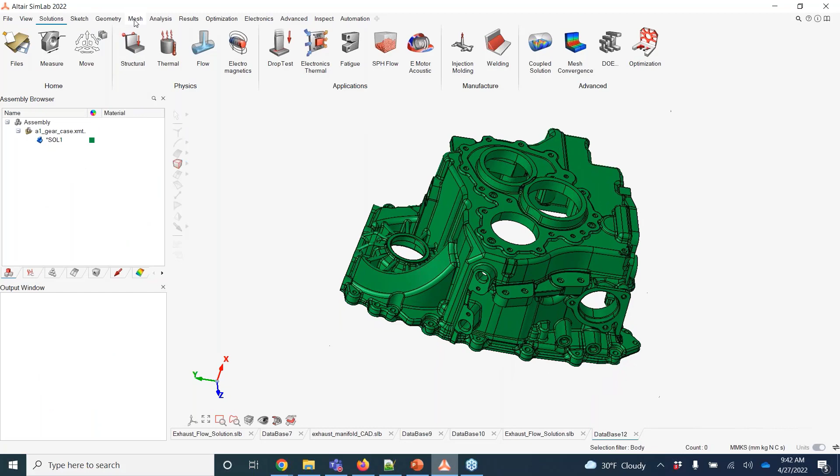I went into meshing, surface mesh. I said I want to create a tri-mesh of 7mm size, don't want to control any other parameters, and I just hit OK, and let SimLab do its thing in the background. What I really need is just that portion of code that SimLab is using to create automation.

I will again go to my scripting part, open session script, copy that section of code, and then again paste it into my empty script. So I again pasted this surface mesh script here, right? It's still hard coded because your file names are hard coded, so you are using this file. If you want to use it on some other CAD, you can just simply change the name of the geometry and you're all set to go here.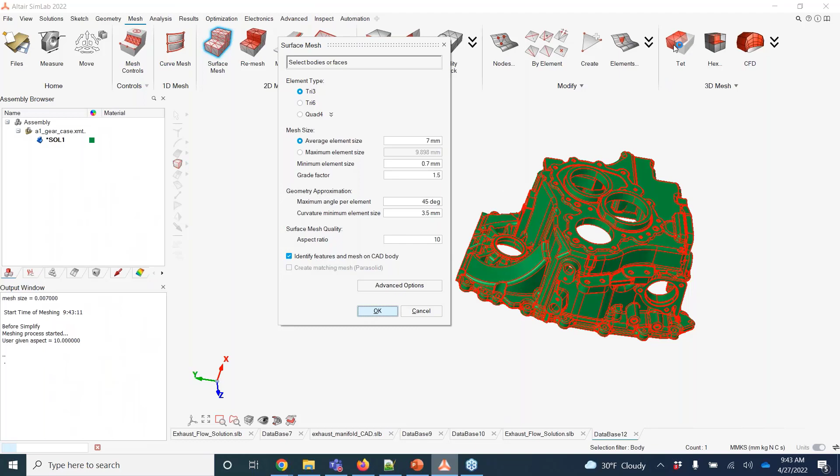Second thing that I'm going to do is after this surface mesh is a tet mesh. I again came to the GUI. When the surface mesh was complete, I went into the tet mesh setting, okay, I created a tet mesh. I copied it from the session script and I pasted it into my own script. And the last thing was to export this mesh somewhere in the location that I want.

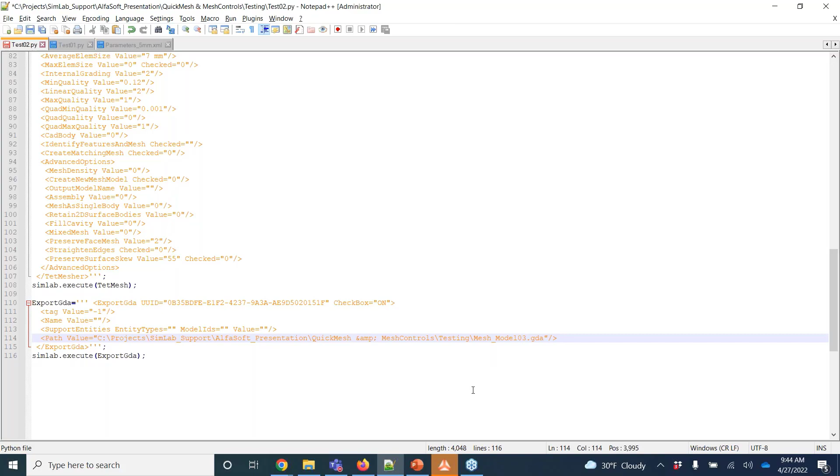So I wanted it to export in this location with this name. Right now, for the sake of this demo, let's change the name to model 03 so that we know that the script is actually working.

Surface mesh created. As I was saying, after that you can create tet mesh and you can also save file, export, and export this mesh here.

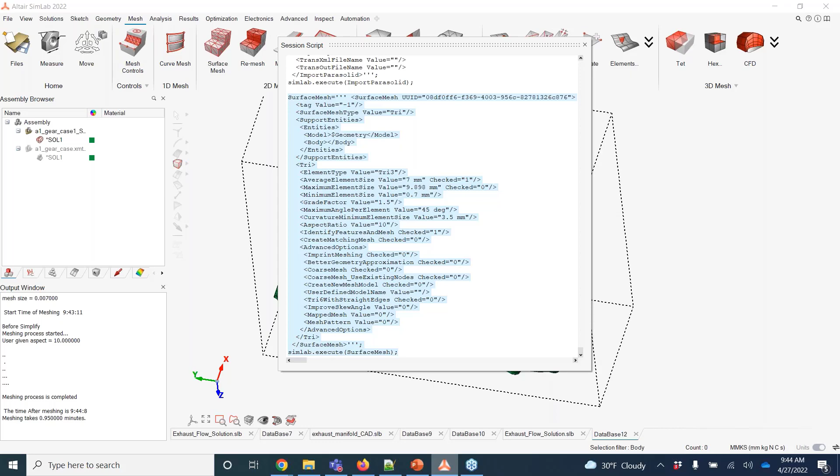Copy everything that you are doing from this scripting and session scripting, so you can see now SimLab has copied this surface mesh. This is what it's doing in the background. Just copy it into your empty file and create a script out of it. When you are trying to use that script on some other part, just open a new SimLab session.

I hope all of us are smart enough to understand that if my file name is changing, I will be changing it here, converting the hard coding into soft coding wherever this file name is mentioned in the script. Just save the Python script, come to your SimLab empty session, go to automation, say scripting, and now instead of opening the session script, you are just going to play the script. So I'm just going to say auto and play my script.

So now SimLab is reading that script. That script contains just 3 or 4 steps. We just imported the CAD. This import CAD is completed without doing any click, just through scripting. It's now creating surface mesh since we had copied that command into our scripting. After that, it's going to create tet mesh and then export that without touching the mouse. It's just using its script that's in the background.

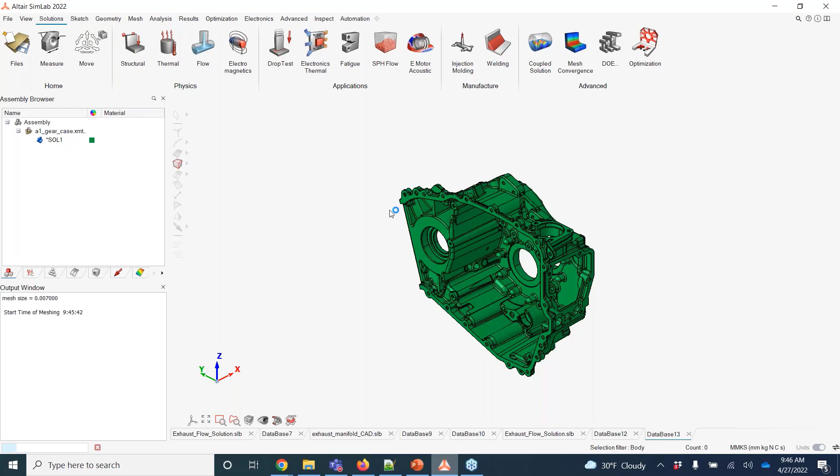So this was about a simple script. We will let it run. The automation capabilities of SimLab are huge. You can literally automate everything. Let me show you a quick example.

So this was like a very simple script that I just showed. What if you want to control meshing parameters from some variables, or if your management has sent you some meshing parameters that you really need to follow, and you also want to keep that in a script. So you can see a script that I created. I'll just quickly go over that script. Let me see if this one is the script that I was talking about.

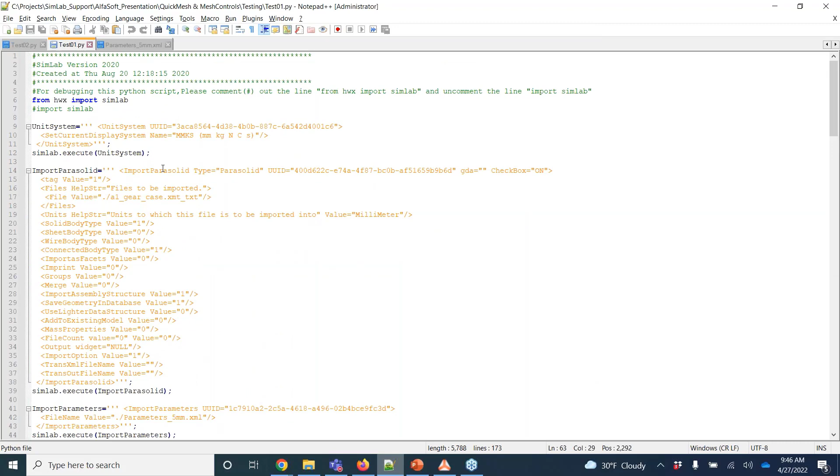There you go. So in this script, first I'm importing a parasolid. I am not that smart that I have written this code by myself — this is everything that I copied from the background itself. So you can easily do that.

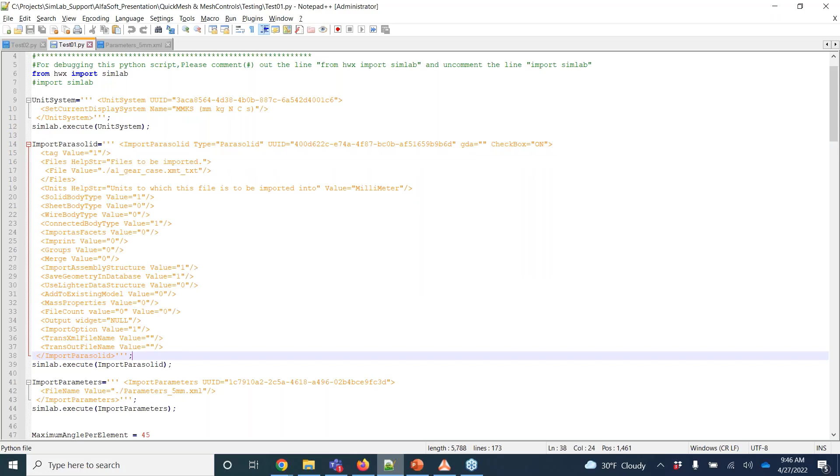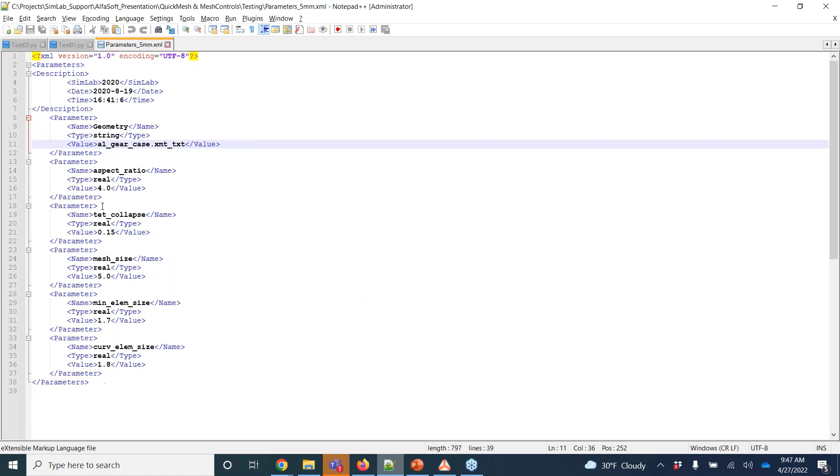I am importing a parameter file that I have already created. This is a parameter file that my management sent me, saying you need to keep these mesh qualities — aspect ratios, tet collapse, and everything. And then I'm reading those parameters — element length, aspect ratios, and tet collapse.

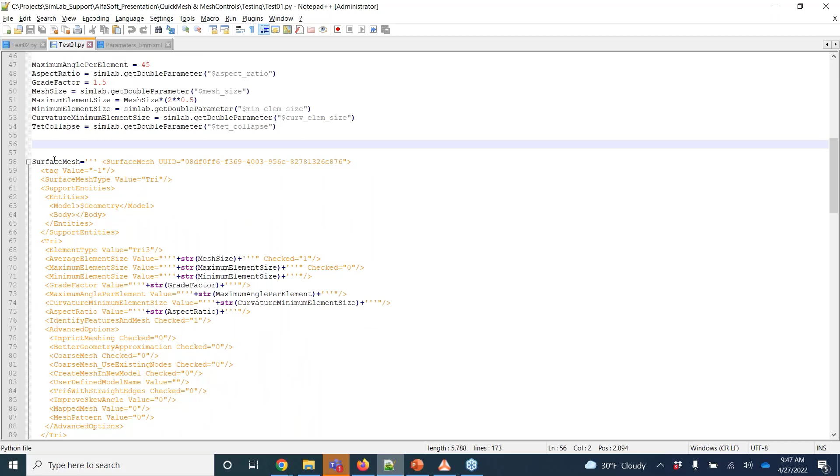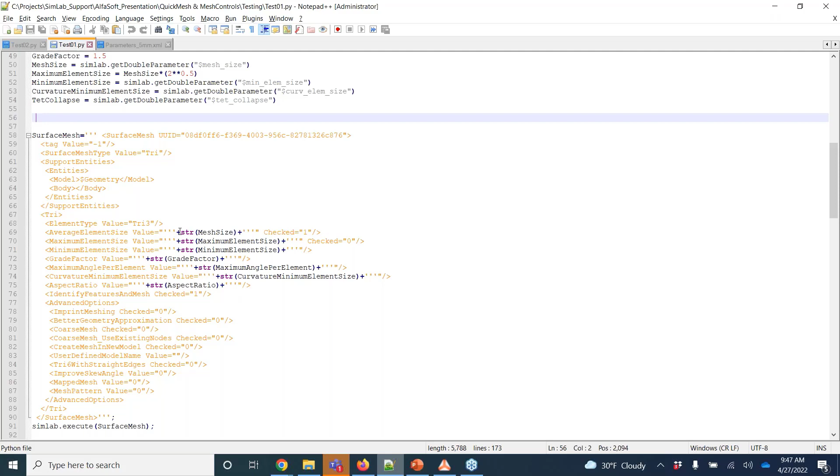And then I'm creating my surface mesh, instead of just on one meshing criteria. I'm creating the surface mesh based on the criteria that I have given in the parameters file. So I'm just creating variables and reading the values from those variables. This was just one level up from the automation that we created earlier.

Let's just move back here. And now you can see we have created the mesh that we were doing manually earlier, with the use of just a few commands here. Excuse me, and let's see if it has exported the mesh now.

So, AlfaSoft, quick mesh control, testing — there you go, it has already exported the mesh with this name. Our file had 03 instead of 02, so this is a new mesh exported solely from those scripts.

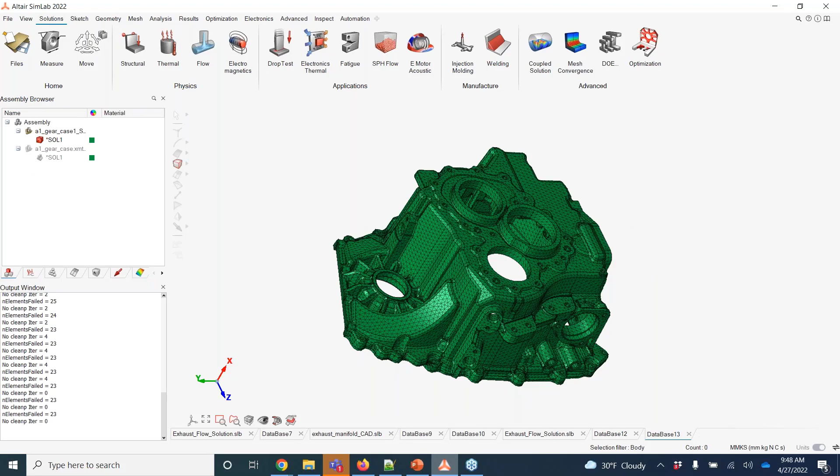So this was all from my side regarding the demo of a simple multi-physics run and a very simple automation script about SimLab. Feel free to ask any question you have regarding the tool.

Finn, you want to take it over from here? Yeah, okay, so great, thank you. So we do have some questions here for you.

The first one here is, we are already using HyperMesh. How can we use SimLab without investing extra money?

Sure. Joachim, you want to take it or you want me to answer it? Oh, sure, please go ahead. You can answer. Yeah, sure.

So based on the licensing type that we have, Altair licensing is based on units. So you can either use those units for SimLab or you can use it for HyperMesh or any other Altair tool — you just need to purchase Altair units. Since you already have HyperMesh, I'm assuming you for sure have Altair units. You can simply use those units to run SimLab, but they are not going to work in parallel — you will have to close one of them and then extract those units for SimLab itself. So yes, you can use SimLab with HyperMesh without investing anything extra.

Next question: what's SimLab's offer to the electronics industry?

Yes, we cater to the electronics industry in great detail. SimLab has excellent meshing capabilities, including creating hex mesh, and you can import files from ECAD software, which will automatically identify where copper tracings have been placed, categorizing them into submodels and assemblies to make the task easier. We also support a solver called ElectroFlo, an Altair solver used to check thermal cooling, heat dissipation, and other thermal aspects for electronic cooling. As far as OptiStruct and SimLab are concerned, you can do random vibration fatigue, weld fatigue, or solder fatigue specific to electronic components. So these are all the capabilities we offer to electronic industries.

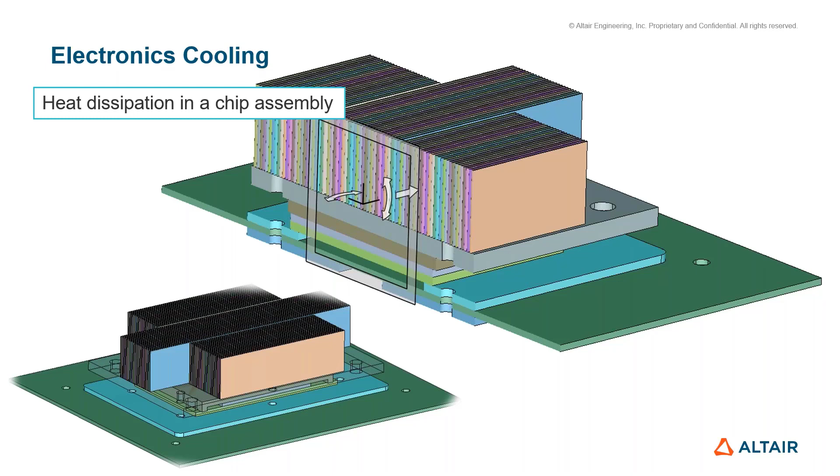Sure, there are two things when it comes to learning SimLab. If you already have SimLab installed, on the right hand side there's an icon that looks like a book, and you can click it. It will take you to the SimLab Learning Center, where you'll find more than 100 tutorials with linked videos and models, gradually increasing in difficulty.

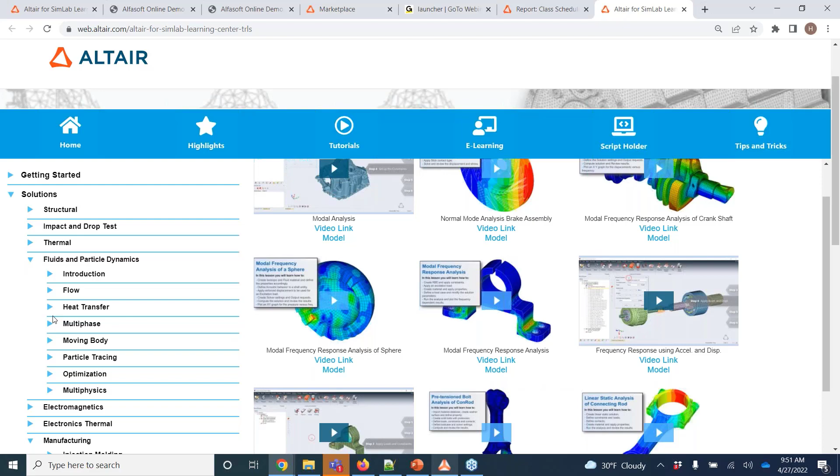So if you want to do multi-physics, there are many physics that SimLab supports, hence you see a long list here. If I select multi-physics and choose the one I showed in the webinar, here's the video link. You can download the model, follow the video, and learn it from the SimLab Learning Center.

Another way of learning it, for SimLab or any other Altair tool, is to create your Altair One account, go to Altair's Learning and Development page, and we have the class schedule for every free class we're going to offer in the upcoming days. You can select the language you wish to attend in, maybe English, German, French, based on your needs, and the product you want to learn.

These are completely free classes. You just need to create an Altair One account, head to the Learning and Development pages, and you'll see all the free classes Altair is offering right now. You can also select your region wherever you're based, simply register, and you're all set to attend those classes.

That's impressive. May I ask how long these online classes are? Is it like an hour or so?

It really depends on the tool you're going to use. Let's say SimSolid, I'm hoping it's a small tool, let me check. Okay, so this is not actually small, it's 3 hours, but just one day, one session. Usually the tools are very extensive. OptiStruct classes, for example, are usually 3 hours per day for 4 days a week. So it really depends on the tool you're aiming to learn.